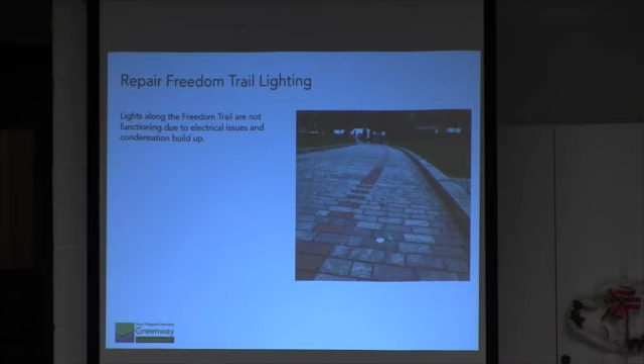The Freedom Trail lights—these are LED, but I think what I've learned is that LED light sources have come a long way in the last 7 years since these were first installed. Most of them are not working at this point, so we will be replacing all of them. We've already replaced the parts of the system called drivers—we had to do that to determine exactly how many of the lights were indeed not working. Of the 23 of these lights, there are very few working at this point. Hopefully in a couple of months, when we get them in and installed, they'll all be restored and working.

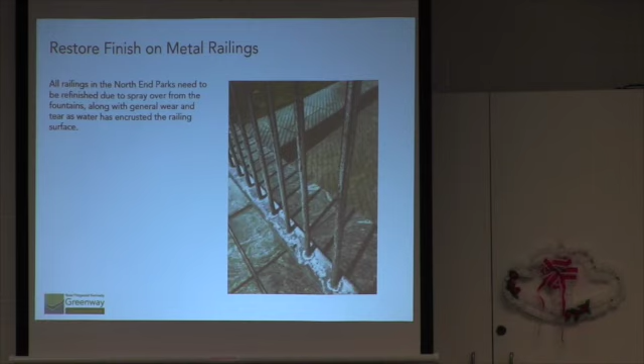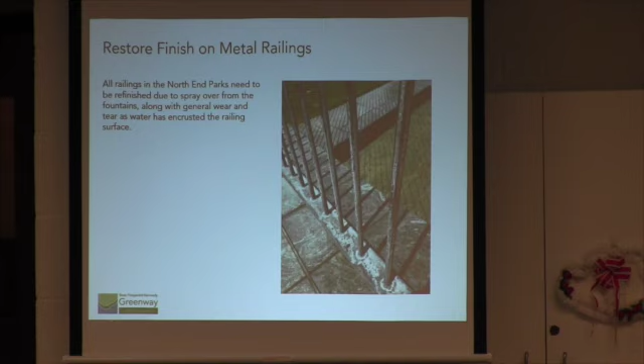The railings that are all around the fountains and the two parcels in the north end are made of two different materials. Some are steel that are painted, and some parts are bronze. When the wind blows, a lot of that fountain water gets sprayed onto these surfaces, and they've developed a scale coating that at this point needs to be removed, then the surface is either repainted or, in the case of bronze, refurbished.

Part of that process is we want to work with the vendor that will be doing that work for us and ask them, is there any kind of coating we can put on that's easier for us to clean and maintain, so that they never get looking like that again?

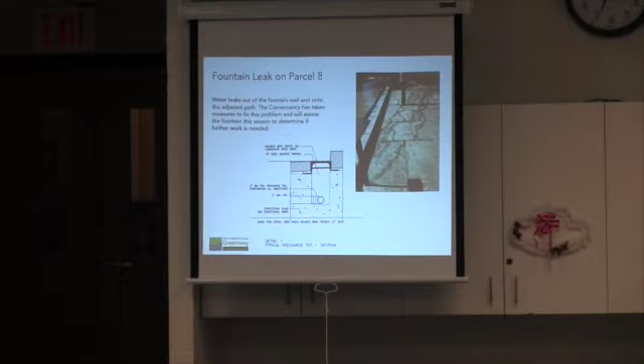This is in the northern of the two parcels, just north of the Freedom Trail. We've had this water leak from the fountain across the pavement for some time now. There was a problem with this originally when they were installing it, and we had a contractor come in and inject a sealant into the masonry system. That has not held up over time.

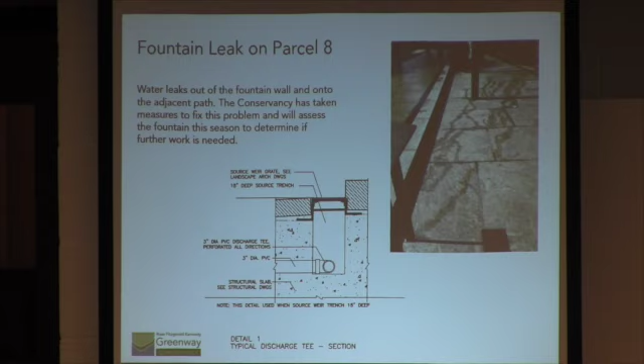We spent, the mason on my staff and a couple of others, spent about 3 days this fall kind of taking it apart, looking at it, trying to determine what was going on. So there are several things. Unfortunately, when you get into something like this, you find there's more going on than you thought.

Off the back, that section drawing shows you a section through the trough. That is the trough. The water comes through that pipe, it fills the trough, rises to the surface, and spills over the large granite pavement on the left of the photo.

That trough is cast-in-place concrete. It has joints every so often. The sealant in those joints has failed. The protective waterproofing coating on all three walls of the trough has also failed. So this is not just a matter of sealing between where the granite meets the concrete. There are more problems, a deeper problem than that, which we can talk more about in these slides.

The picture on the left, you'll see a vertical joint in the concrete. That sealant has failed, and what happens is the water goes through, gets to the veneer on the other side, and eventually leaks out. On the right, that's the trough, the pipe—you can sort of see it in there. All the waterproofing in that trough is starting to fail, so we need to remove that pipe, waterproof it properly, put the pipe back in, and that will solve this issue.

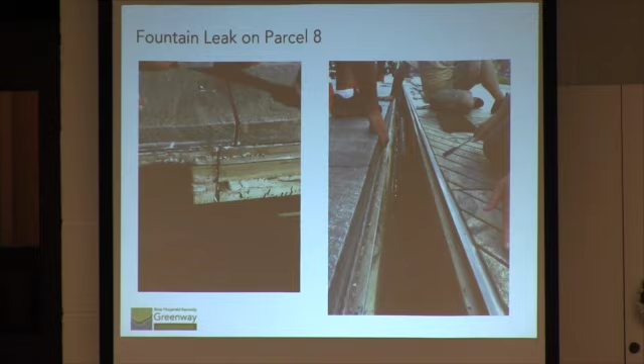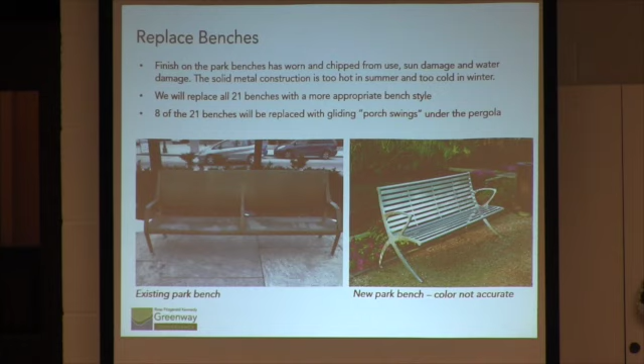The finish on them has not done well at all. These benches are solid steel. They get very hot in the summer, as some of you know. We think there are better choices out there. So the bench on the right is the one we selected for these areas. There are 21 benches in all.

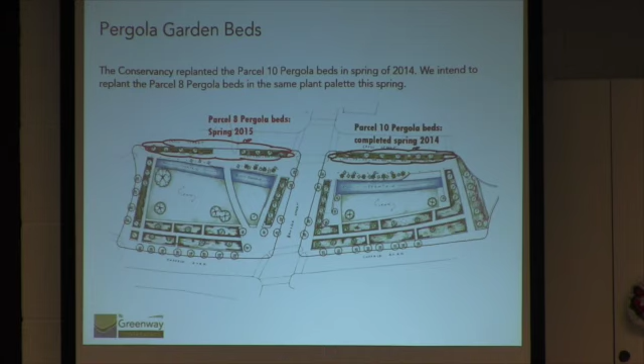The pergola garden beds - we were very excited to begin some horticultural improvements, starting with the shade trees that were mentioned by John earlier. Then last spring on parcel 10, we were able to get into the pergola area after a process of working on design and trying to come up with effective screening, increase the variety of plant material, and achieve four seasons of interest. We introduced this new planting palette into the parcel 10 pergola, and we're very excited this spring to replicate that on parcel 8 as well.

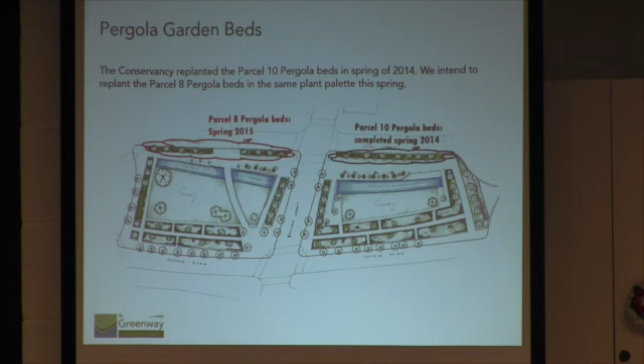There was one continuous pergola bed on parcel 10. There are 2 beds on parcel 8 bisected by the Freedom Trail, and we're pleased that both of those beds will be part of this project. So you'll see a repeat of the plant palette used on 10 in parcel 8 as well. Some things we're trying to achieve with the design approach: retaining the shade trees, since the maple trees already in the bed serve a great purpose; introducing more height in shrubs for diversity; getting that screening effect; and one of the signature plants we used was the knockout rose, for a good pop of color.

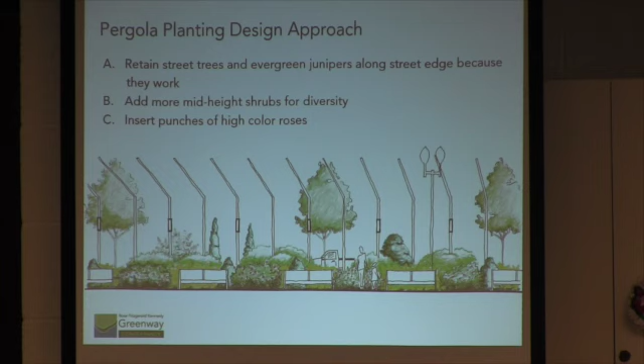I think the real excitement, the big rollout for us on the horticulture staff this spring, is to be involved with the boxwood gardens and seeing the improvement beginning there. There will be a renovation this spring of the parcel 8 boxwood gardens, and then a continuation of trying to fund that work carrying over in the future, we hope, to parcel 10 as well.

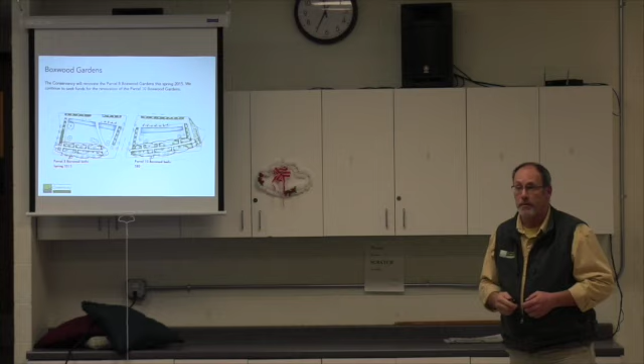This is going to be a very exciting project for us. It's going to involve, the image on the left is parcel 8, all of the boxwood beds. There'll be a renovation of all of those, and we hope that's going to be a big success.

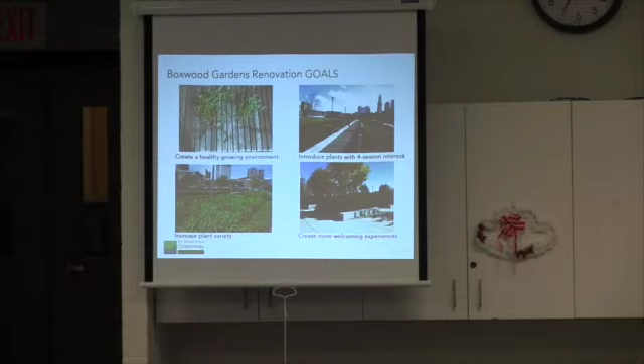Some of the goals we're trying to achieve with this project: creating a healthy growing environment. We have problems with a heavy amount of weed stock, particularly vetch, growing through the beds. It's an invasive weed with a very aggressive, spreading root system. We have a very healthy population of this bad, undesirable plant in the boxwood beds, and we'd like to remove it as part of the renovation.

Introducing plants with 4 seasons of interest, and increasing plant variety. The boxwood beds in their current state are very dense, with a lot of plant material. Much of it, from a textural and color standpoint, looks very similar, appearing as just a mass of vegetation.

We hope to jazz that up considerably, including the entrances as you approach from the north, south, east, and west. These heavy boxwoods and towering presence of taxus trees greet you, with one dark plant at eye level and even above in some cases, which doesn't seem like the best solution. We'd like to open these up, get more color and excitement, and create a more welcoming entrance into the boxwood beds.

In doing this, I mentioned a collaborative effort. It originated some time ago through this public process, and we were fortunate enough to work with Lynden Miller out of New York City, who's been responsible for countless renovations of really great public and private spaces.

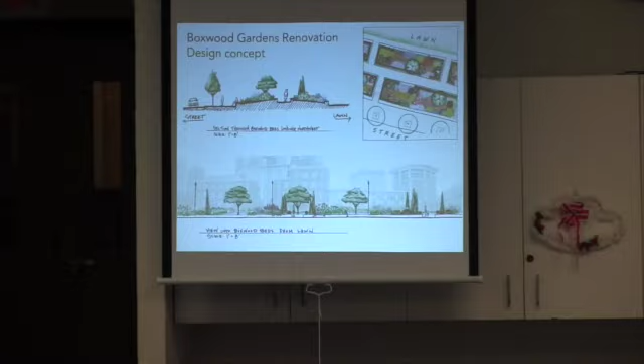These are some sketches that Hannah Whipple, who's on our staff, had done at a fairly early stage. The section on top gives a sense of the scale we're working in, adding a fair amount of plant material that will show above the boxwood layer. Right now, most of the perennials come up, but there's no other structure or bones to the boxwood beds.

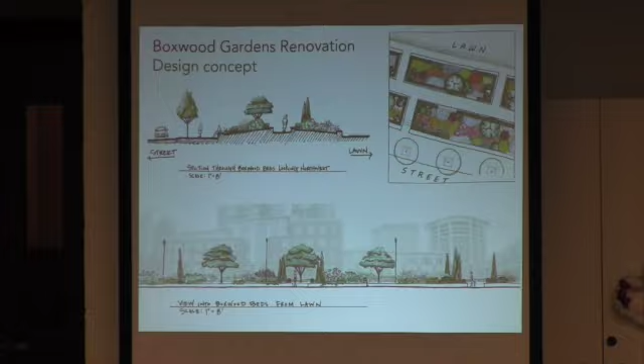The bottom sketch is an elevation showing we're adding quite a bit more bones and beefiness to the boxwood. We'll be adding some additional trees, a nice mix of shrubs including spring flowering, interesting foliage, some summer flowering, and others that provide fall color interest.

We are putting in some very thin vertical elements, which will speak again to some of the formality that's implied by the boxwood beds, but it will be quite a lively, flexible planting within that structure.

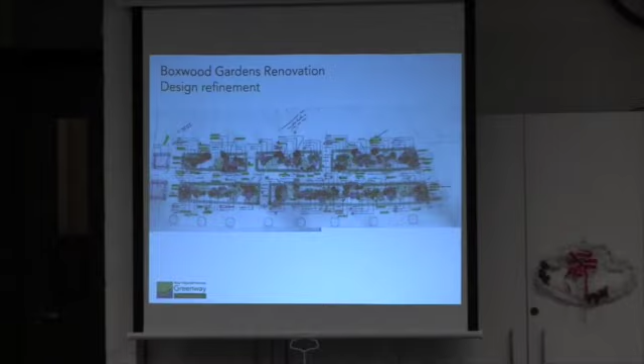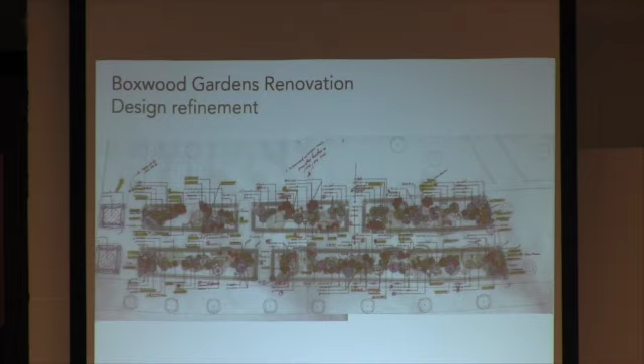This is just a sample of our design plan. We've gone through about 4 iterations of the planting design. Hannah and I have worked on it quite a bit. We landed on most of our plant palette by working with Linda Miller, and we've also engaged the drafting and advice of a landscape architect who works with the contractor we'll be working with. That's the state we're at, and I'm very excited about what we're going to be able to add into these beds.

Another element, which you can't really see here, is that we are going to be opening the boxwood beds, having a section open from the boxwood hedge that will be facing the lawn. Hannah and I talked a lot about the front porch, front lawn concept that was originally intended in the North End parks. We felt that we want people to feel that the boxwood plantings are accessible and something they want to explore when sitting on the lawn, so they'll be able to see into the planting beds a little bit from the lawn area rather than having to peer over the boxwood hedges.

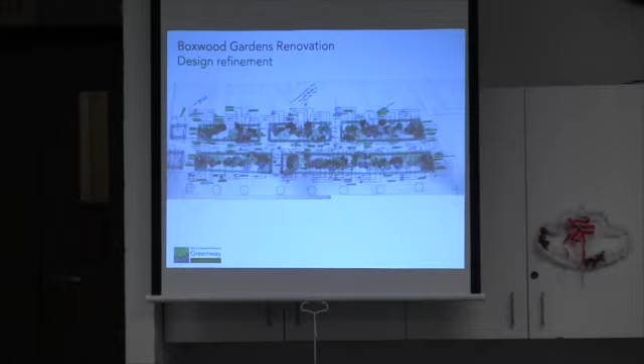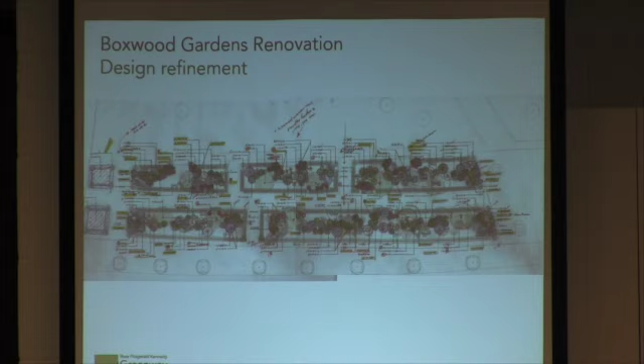Can you just show where the boxwoods are on that plan? If you were sitting in the park, I'm just curious. So if you're in the park, just here - the fountain would be back here. Dara's point is opening up this side, what we're referring to as the lawn side and the east side - just point to the little openings. There are only 3 of them, one in each bed, maybe a 10 or 12-foot section, just a little invitation. Not enough, we hope, to actually invite people to walk into the beds - not too inviting, just curious.

And with that, I'm going to hand it back to Stu to talk a little bit about the contractor that we're in talks with.

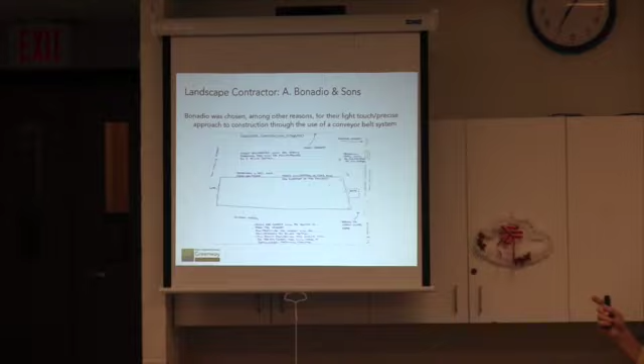I even need to get a little closer to this one to read, so I apologize again for the small screen. But everything went out to bid. I believe we had 6 contractors given the opportunity to bid on the project based on their credentials, and we thought they'd be worthy candidates to work with. We got 3 proposals back. They were all great, with interesting elements to each one, but in the end we went with a local company, Bonadio and Sons. The committee was myself, Dara, and Anthony Ruggiero, a horticulture foreman who many have met.

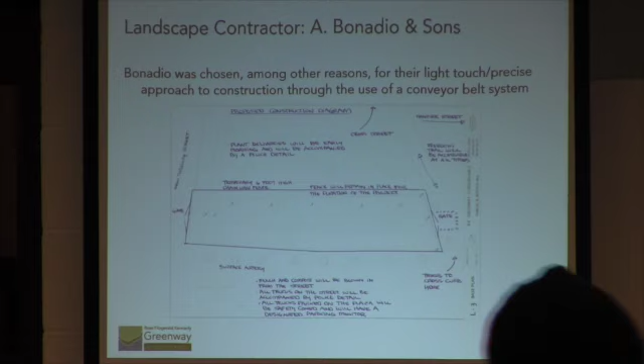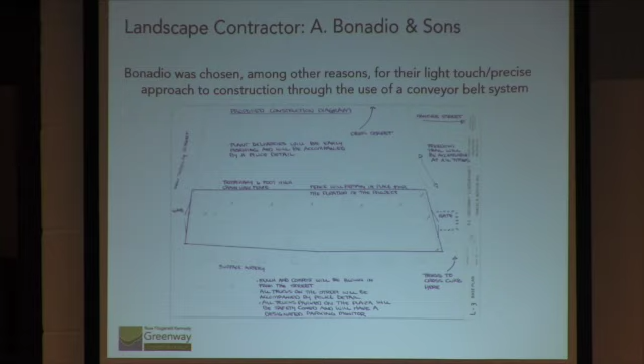Hannah, that Dara referenced, director of park operations, was involved in understanding all the different proposals that came in. What I really liked about the Bonadio proposal was that they seemed to very much understand the importance of this landscape to the North End parks, and recognized this work won't take place in the wintertime - it needs to happen in warmer weather when the parks are counted on as a recreational space for everybody to enjoy. Their approach was very light touch, with a precise plan for how they'd handle the job. What we had asked for - this is literally the perimeter of the boxwood beds - their plan for the construction fence is to stay as close to that perimeter as possible, almost onto it.

We had other proposals that came in that thought it would be necessary to use almost 50% of the lawn as a laydown area for their equipment and the whole process, and we just didn't think we could give up the valuable lawn space to this effort this time.

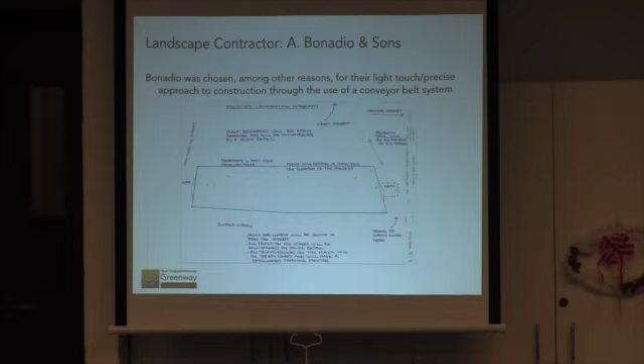So they had a great approach. It even involves the use of a conveyor belt that they're going to be bringing in. It's a tow-behind piece of equipment, but it'll be set up down through the main path of the boxwood beds. They plan to begin their work in the north end of the boxwood beds, and they will be setting up temporary bridging over the pathways, so from one bed to another they can go through with their equipment. The conveyor belt will be there in the middle, and everything will be conveyor belted out to awaiting trucks and all taken away. A very clean, precise approach, and that really resonated with us.

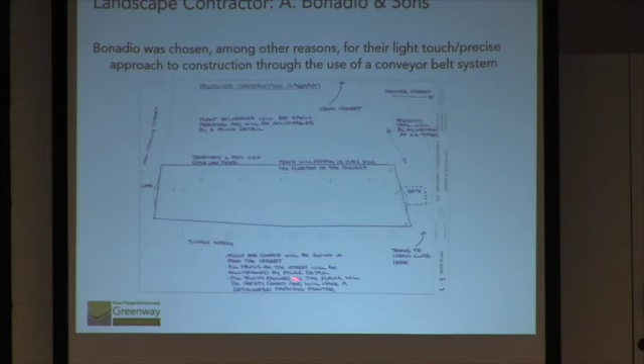It was really important, some of the things that you may not be able to read from a distance here. When we get to the mulching and composting phase of the project, we have the ability to blow that in. We're trying to be very cognizant of the fact that we have very healthy soils, absent of the fact that we have a weed problem. The soils themselves are extremely healthy, and we want to minimize our impact of disturbing the good soils that are already in place. So when we do the mulching and the composting, we don't have to add a lot of equipment into the beds. That can all be blown in from the street.

Truck access is all going to be done properly with police detail. We're going to have safety cones, and all the pedestrian and public safety was stressed to them, and they seem to really get it and work well with us.

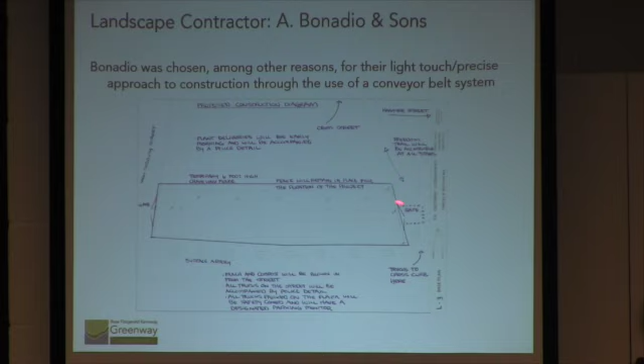The access point will be here from the southwest corner of the boxwood beds. There will be a little bump out with a gate enclosure here, just to allow for the gates to swing open and out. We don't think at any time, to any great detail, the Freedom Trail or any public pedestrian access will be really impeded, absent of going into the boxwood beds. Obviously, it'll be a work zone, so we'll have to restrict access there. But we're very happy that part of their proposal allowed for the Freedom Trail to remain open at all times.

So it's a good company. It's got a good feel. They have, I think, some ties to the North End community themselves. So we're really looking forward to working with them. I think it'll be a great partnership to get this project through to completion.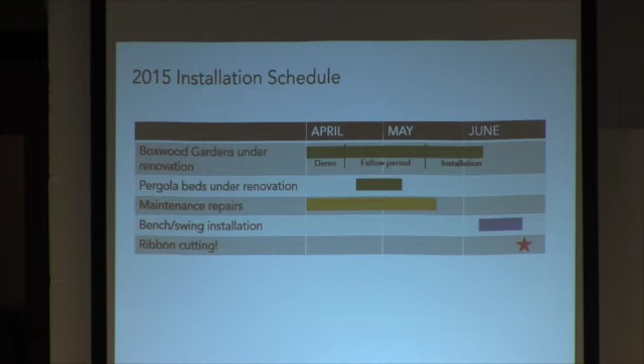A little bit about the schedule, how it's all going to come together. We do hope to begin the demo phase of the boxwood beds in early April. That's our goal, weather permitting. We're still not under a few feet of snow, so we should be able to start.

There'll be a demolition of pretty much all of the existing material. The boxwood beds, the boxwoods themselves, are not healthy plants. We'll be replacing those with new ones. So a lot of material is going to go, but there will be some stuff salvaged, and we're very happy to be able to keep going in that direction.

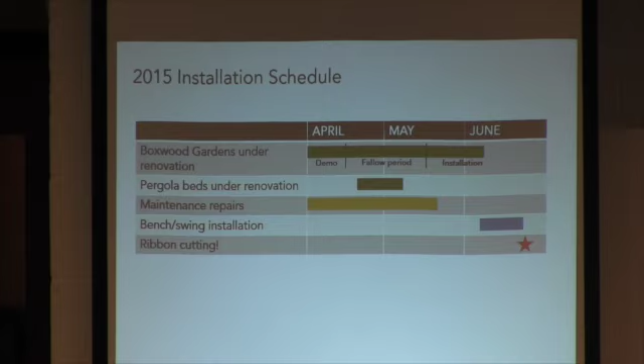It's very important to the horticulture staff that when possible we do salvage healthy plants, and we've had a great success rate of repurposing material elsewhere on the Greenway. So some of the smaller stuff, some iris and daylilies that Dara's identified, and I believe 3 of the Amelanchier trees, we feel can all come out and find new homes in other locations on the Greenway. So that's all part of the demo, getting them down to a clean palette.

There will be a period of time where the project and the boxwood beds will stop. It's called the fallow period, and this is where the beds have all been stripped of their vegetation. Things that are going to be salvaged have been transplanted out. They will remain empty for a period of time, and the goal here is for us to assess: are we seeing the reemergence of the vetch, and if so, will we be continuing our control methods to try to eradicate that? This was all planned and seemed to make sense.

It's great for the contractor. There really won't be much of a break in their actual work schedule. They'll transition from the demo phase in the boxwood beds over to the installation of the pergola beds during that period, and then in mid-May they should be starting back up and see through into June for the completion of the boxwood beds.

While this is all going on in the boxwood beds and the pergola, Bob has just done a great job of detailing all the wonderful improvements they're going to be doing. That'll be happening up until mid-May. We're looking forward to possibly the swings in addition to the benches. I'm kind of excited to see if the swings are going to be a possibility, and we look forward to sometime in the second half of June to having a wonderful ribbon cutting ceremony. So that's the horticulture coming to the north end.

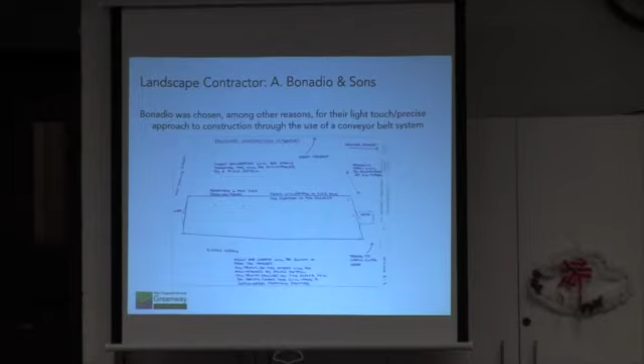It was over 3 days or something, and something less than 12 truckloads. So it's very minimal compared to what we were looking at before—30 truckloads of material, since they were stripping a lot of material out. After consulting with other soil experts and testing it ourselves, looking at compost, we think we can supplement it on site.

The conveyor was a surprise to all of us—it became a cost-effective means of doing this.

So, happy to take more questions on this later or now.

The release parcels—Steve will go through this. Let me just give a little backstory for those who haven't been following it closely. So we're a nonprofit, 501c3. We exist—we were set up via legislation to be the steward of the parks.

We're set up initially to fundraise for the parks. When we met certain goals for that, we were then enabled by 2008 legislation to be the stewards of the park. We signed a lease with the Massachusetts Department of Transportation, MassDOT, and took operation of the park in February of 2009, so 6 years ago, almost exactly.

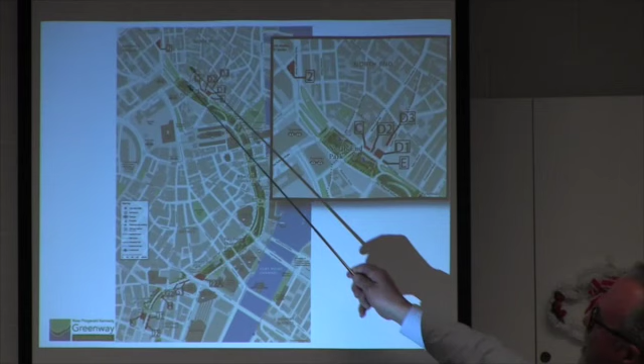So I'm going to go old school on you with a pointer. So these parcels in red are the new parcels that we're taking, and I'm going to really only focus on the parcels here in the north end.

Right now, this is the north end park, Parcel 8. Quiz time, who knows what this parcel is? Parcel 5... oh, that's fine, yeah, Parcel 6 here.

So right now, this is the northern end of what we take care of. Parcel 2 is a parcel, I'll show a picture of it in a minute, but that will become our northernmost piece. These other parcels are the portal to the Sumner, this is Callahan, this is the 128 North Street building, Federal Admin. So we'll be taking on that lawn in front and a couple of plant beds along the side of the building.

So in thinking about how do we take these parcels and make them Greenway-like, you know, we're an organic horticultural group. One thing we don't want to do is spend a lot of money on plant material and have it die or fail.

So the first thing we want to do, did I hit a button? Back to the stick. Yeah, that's the stick.

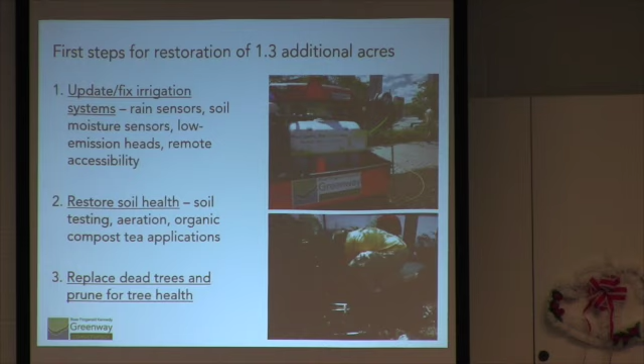The first thing we want to do is get the irrigation up and running, because any plant material we put out there is going to fail unless we have irrigation. So first we want to upgrade the systems to what the rest of the Greenway is going to have. We want to test the soil, supplement it to the point where we feel it will support our plant materials. And then we are inheriting a lot of trees that have never been pruned or are currently dead.

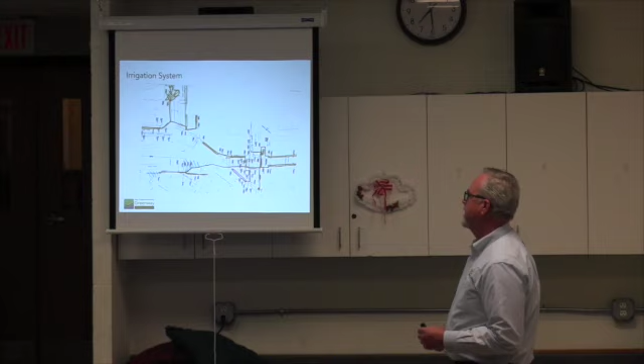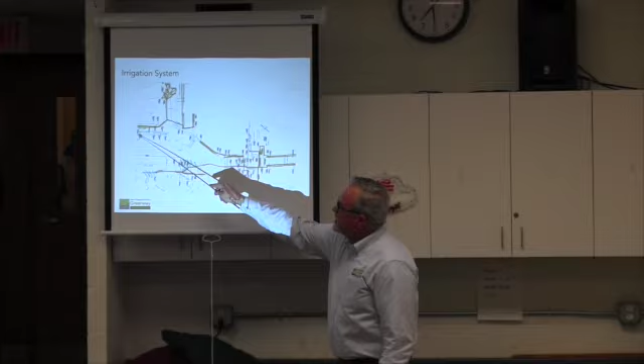One of the problems with the irrigation system is, well, you can see how complicated it is. So if this is parcel 5 here, this is the northern end of 6, and we own this side of parcel 6. The stuff in blue is actually what the Greenway now controls and takes care of.

We're being asked to take on parcel 2. All the stuff you see in yellow is part of a city system, and the controller here is actually a city controller.

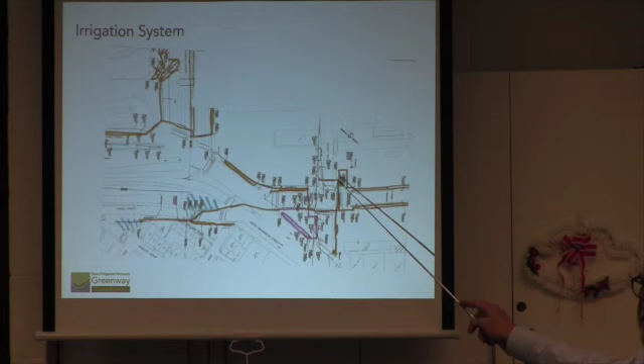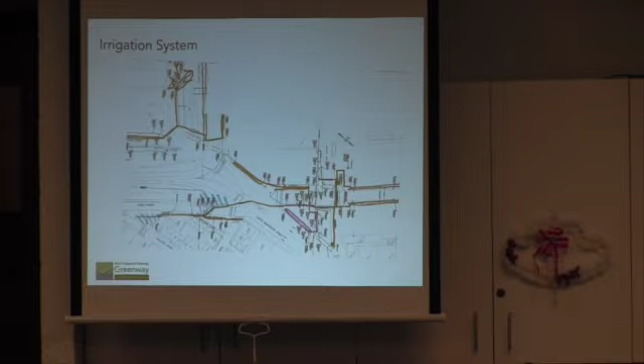So as we take this on, first of all, we want to replace the controller. Then we're going to turn this on and find probably a lot of leaks in the system that has not been really maintained in 8 years. So our first focus this first year, I believe, is going to be almost entirely on irrigation, and then it will be on the soil quality.

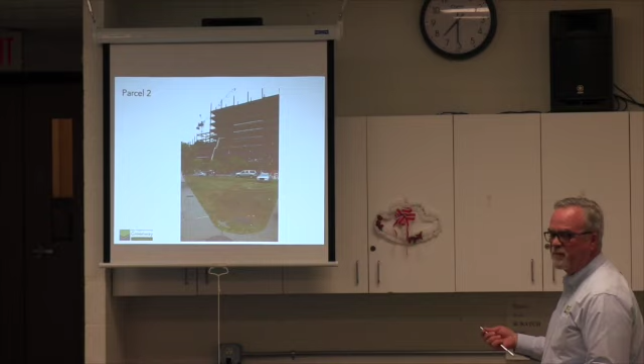This is parcel 2 currently. As you can see, it's not well maintained. Right now there's a lot of parking on it, compacted soil. Again, get the irrigation back on, and we'll make some soil improvements here, and we'll see if we can get a lawn back on it. Or we'll have another meeting like this and get ideas for what to do there.

But bear with us in this first year. I think a lot of it's going to be a learning exercise of what we can do to improve these, taking a lot of input from people on how they would like to see it improved, and then move forward probably in the next couple of years to take all of the parcels you saw in the first plan and bring them up to our standard. And I think that's it.

Yes, Charlie McCabe, our Director of Programs. Thanks. So last but not least, maybe not, want to give you a quick update on programming.

So Public Programs is responsible for programs and events. We do about 300 a year on the Greenway, Greenway-wide. We're also responsible for the earned revenue side of things, such as the carousel, as well as the food vending program.

The North End is actually a fun set of park parcels to program, because it gets a lot of what we call passive use, people enjoying the sun when it's above 45 degrees and there's no snow. We've done a series of concerts, a lot of exercise classes. One of the things we'll have to do this year, given the construction in the first half of the summer on the North End parcel, or parcel 8, will be to ratchet that back and move some things over to parcel 10.

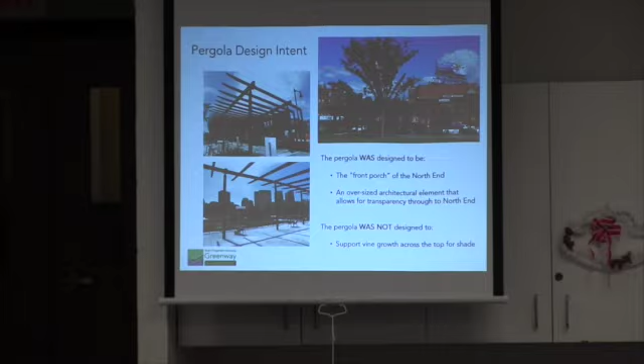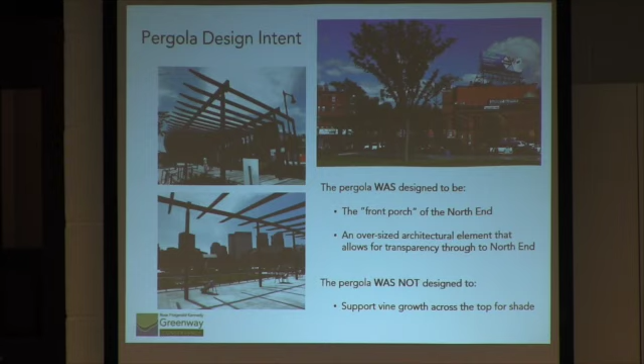I think that does pose the question of what it was designed for then. It is a beautiful architectural element that frames the Custom House Tower in a very nice way, but it does pose the question - for what, then? One of the things we'll do is give it a little purpose by hanging porch swings from it, but I think there's an ongoing conversation - if it can't grow vines, what is it for?

Happy to have more discussion around that, and I look forward to seeing your proposal. You're 100% correct, because that's not what it actually ended up being built to be. Victor Branya, the historian here, can attest that when all of that was proposed, the pergola was supposed to be made in wood, if you recall - they talked about doing it in teak wood, and an Italian organization had even come in and talked about the wood. I feel badly about what actually ended up there, because going way back before 2009, to 2000 when we first sat in meetings, we talked about how to cover it. It was a difficult challenge to cover the pergola as it sits now.

Either you get rid of it or you repair it, whatever the cost factor is - because like someone said, it looks like an unfinished piece of steel hanging there waiting for something to be done. I don't know what the cost is for the necessary repairs, but I mean overall maintaining the steel structure, painting it, filling the holes, and reestablishing its footing in the ground. Maybe down the road, since it's now under the jurisdiction, it could be replaced entirely at some point if you can't do much with it.

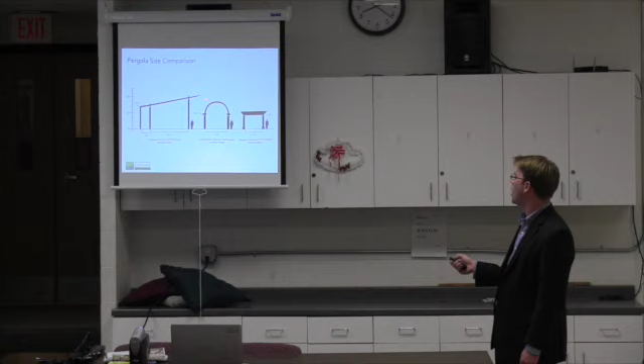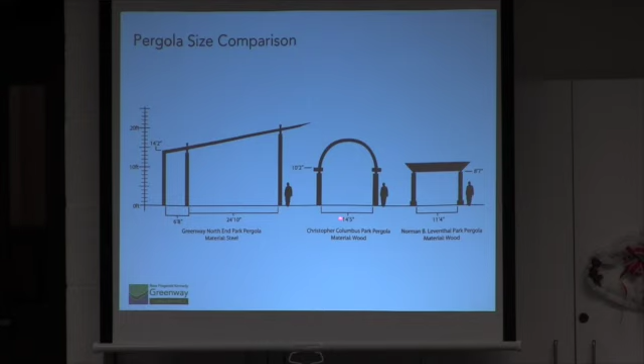The proportions are wrong on the Christopher Columbus Pergola on that slide. How wrong? Well, it's probably off by 3 feet in terms of height. It's an 8-foot radius on the arched part, so this should be 8 rather than 14.5. So it should be 18 feet 2 inches. Actually, I think it's more like 14 feet or so. But I'll let you know after we put the lights on. If I run out of light, I'll see.

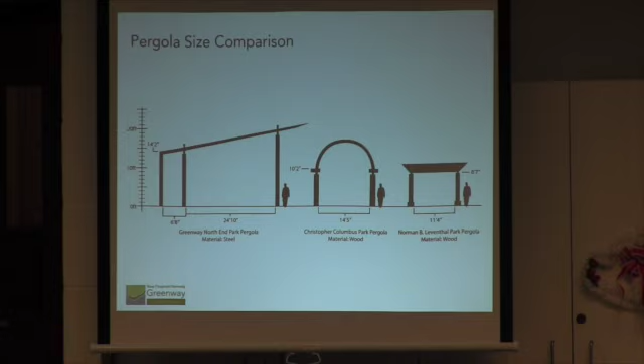And I bet since this was an intern, they went out there and... I think it's also, though, a great slide. I think it also maybe is that our ability to plant is on one side only here, and to get any kind of plant material to go up that and then across is a lot more difficult than either of the other two pergolas, where the material can grow from either side.

Jesse, I agree with you because I recall Linda Jonash actually doing a study to see if in fact they could put vines or whatever. She was very good, very dedicated to that. And she said that it was really not the way to go and it wouldn't last. Couldn't get it - I remember her saying that.

We actually, you asked 2 questions, we answered the second, but I think we somehow moved on. We have some information about this. Perhaps some of it needs a little correction, but happy to share that information to facilitate a conversation about what could happen. I do think the idea of maybe getting rid of it should be contemplated, but that's a very big undertaking and a very significant design change. And relative to other things that several million dollars might be spent on within the North End parks themselves, I think that's a prioritization question.

But Victor, just let me finish - and maybe this should be addressed to Ford, and his new working group on the pergola, or Robbins - and that is, if the pergola is too high, instead of getting rid of it, how about chopping it off and putting the teak wood on top, which will be cooler in the summertime, and then planting vines.